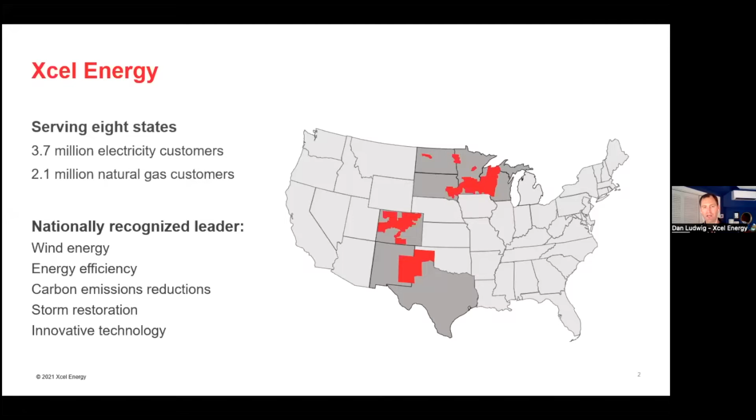This all points to, as we're looking forward, what can we do to help reduce emissions and drive towards a more carbon-free system. So we've made 3 announcements recently. We were the first utility in the nation to commit to carbon-free electricity generation by 2050. There have been a lot of other utilities that have done that since, but we were the first.

We also have an intermediate goal of 80% reduction in carbon emissions from 2005 levels by 2030. Since then, we've made 2 other announcements: to be a net zero natural gas service by 2050, and to have zero carbon fuel for our customers' vehicles within our service territory by 2050.

So these are 3 very ambitious goals. I'd say for the 2030 goals, we've got a pretty clear path, but that last stretch from 2030 to 2050 is going to take some new types of technologies that we probably aren't fully aware of yet, or that aren't fully commercialized yet, that we'll have to develop to get there. I'm going to be speaking mostly about the electricity goal here, but the other goals have a similar discussion.

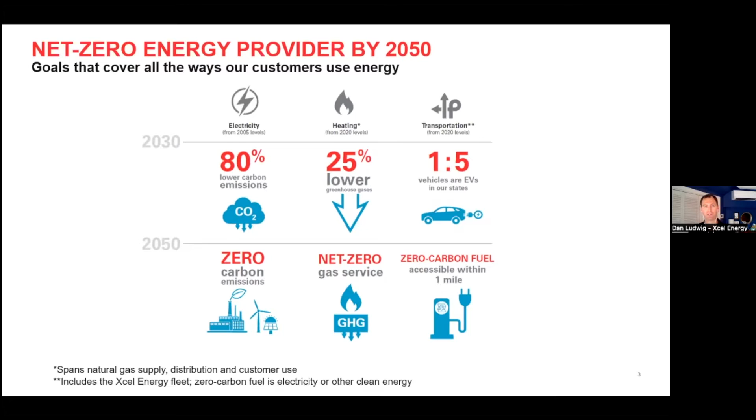So just talking about that electricity goal for a little bit. Our plan right now to get to carbon-free by 2050 involves closing down our coal plants - we're closing a lot of megawatts of coal by 2030. We're also going to be adding a ton of renewables to the system, 5,800 megawatts by 2034, and extending our nuclear plants.

So, like I said, I work on our nuclear side of the house. Part of what we're looking at is how we can keep additional uses for the nuclear plants, to keep them extended and open for longer. And then this last piece: enable a carbon-free future with firm dispatchable generation.

We all love renewable power, but one of the challenges is it's not always available. So in addition to the renewables and nuclear power, we're going to need some additional carbon-free dispatchable generation - something we can turn on when we need it, when it's not windy and not sunny.

Right now, we largely use natural gas plants for that. So if we want to be carbon-free and not use natural gas, we have to find an additional source. And that's where this hydrogen stuff starts to fit in.

We want to do all this in an affordable way and keep the system reliable. We don't want to have rolling blackouts. We want to make sure people can afford their electricity and keep their power on. So that's kind of our big picture plan.

Looking at that 2030 plan, where we're going to reduce our carbon emissions by 80% from 2005 levels - you can see right now we're about 60% carbon-free in 2020, between nuclear, wind, solar, and some other generation, largely hydro.

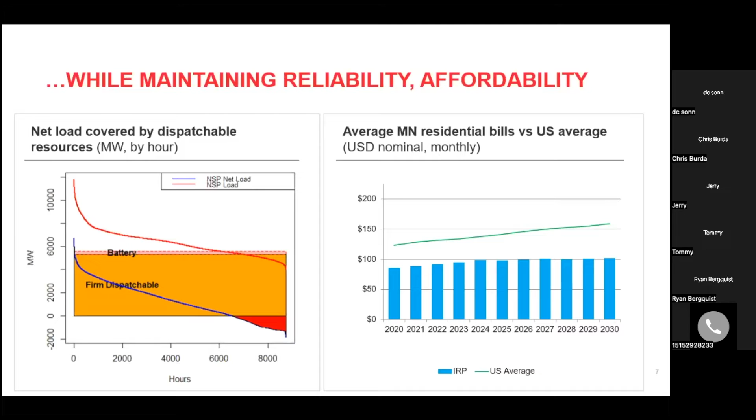Right, yeah, and this is our plan that we've submitted to our regulator, the Public Utilities Commission, and we've proposed adding this - it's quite a large battery, but it's small compared to the rest of the graph here. If we wanted to add enough batteries to cover this whole thing, that'd be a very, very expensive, prohibitively expensive project to put in.

But I don't know if you can hear me. I don't know how to raise my hand either.

This is Chris Burda. My question was about the batteries also. We've been told over and over that we'll never achieve this without batteries, and so energy storage in whatever capacity, whether it's batteries or another technique - but yeah, I agree, I'm wondering why this doesn't expand and contract at different times, the battery. Right.

Well, and in particular, these days, whenever you see a new solar field announced, it almost always is accompanied by some sort of a battery installation.

Sure, and I'm frankly not a battery expert, so I can't speak to it in detail. I know batteries are really great for short duration storage, so for less than 3 or 4 hours, that's where they're the most cost-effective energy storage mechanism. When you start talking about extended power availability for more than a couple hours, batteries get very expensive and very difficult to use in that capacity. That's why we're talking about technologies that probably don't exist yet, and we're looking across the board at various energy storage means so we can have firm, dispatchable, all available power when we need it.

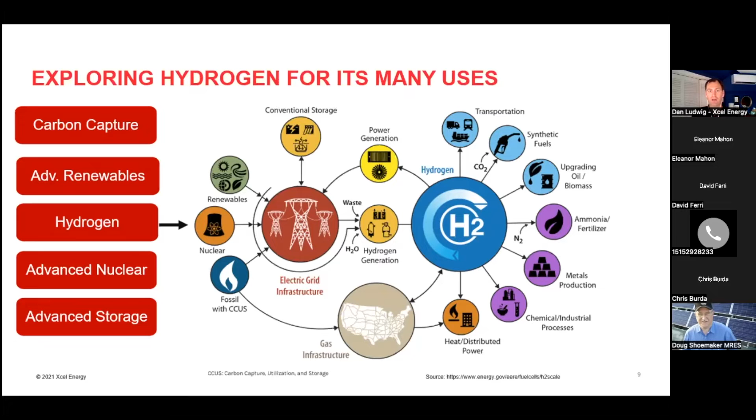So why aren't we doing this already? Well, hydrogen is not cost effective. Just trying to make a little bit of a comparison here. Could hydrogen follow the same cost curve as wind? Wind, back 20, 30, 40 years ago, was not cost competitive. But as demand went up and we built more windmills, there was more manufacturing, more supply, more demand, costs came down.

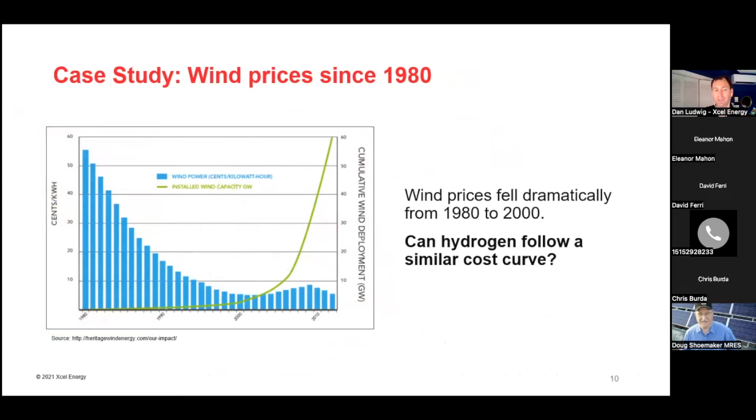And that's really when you saw, starting in 2000 I'd say, is really when you started to see a lot more windmills going up as the cost came down. And so we're looking at hydrogen similarly. How far back are we on that cost curve? I'm getting some feedback again, if someone could go on mute, thank you.

That's assuming some gas prices like at $3 to $4 per MMBTU, which if you're following natural gas prices, they're a bit higher right now because of, as you can see at the pump, it's a similar story with inflation as well as the Russia-Ukraine war going on. There's a lot going on that affects gas prices, so that's a bit higher right now.

But just kind of pegging this at that long-term average, it's about $1.50 for hydrogen per kilogram right now. So we're in this for the long haul. We're doing research now, we're looking at things now. We're looking forward to say by 2030, this 2030 to 2050, when we're trying to get that last 10 to 15 to 20% of our carbon-free generation, is that when hydrogen will really start becoming cost competitive.

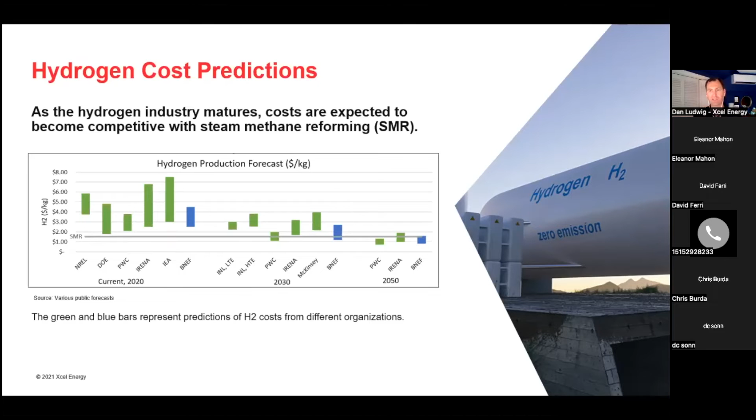So, I'm going to talk specifically about Xcel Energy nuclear. Xcel Energy non-nuclear is also doing a bunch of work on hydrogen, I can kind of speak to that broadly too if anyone has questions on that, but I'm going to talk specifically about what we're doing in nuclear.

So we formed a consortium with 2 other utilities, Energy Harbor, based out of Ohio, and Arizona Public Service, based out of Arizona, as well as Idaho National Lab up in Idaho Falls. We all have nuclear power plants, and we're all exploring how we could integrate nuclear power with hydrogen.

There's a couple of terms here I'll take a few minutes to explain because it's important to show some differences here. Energy Harbor is leading, we're doing this in a multi-phase approach. Energy Harbor took phase 1, and they're installing a low temperature electrolysis skid, like 1 to 2 megawatts, so it's a pretty small scale, low temperature electrolysis system, and they're doing it at their Davis-Besse plant in Ohio.

We also, as part of phase 1, Xcel Energy and APS did what's called a technical and economic assessment. This work was completed by Idaho National Lab, Argonne National Lab, and NREL, National Renewable Energy Lab. We worked together with them to evaluate what were some potential options where we could model making hydrogen from the nuclear plant. We got a lot of really good insights from that.

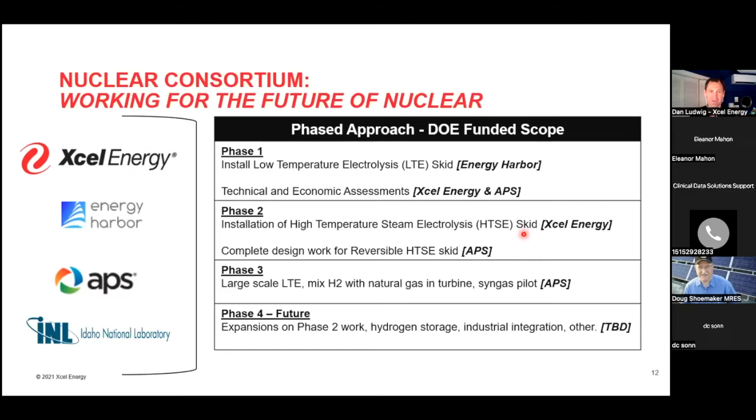For those of you with experience with power generation, this may all be things you know. The way we make nuclear power at Prairie Island, a pressurized water reactor, involves two loops. One loop, called the primary loop, has water that pumps into the reactor, goes through a big heat exchanger called a steam generator, and then goes back to the reactor. That's a closed loop of heating and cooling water. Then we have a second loop, the secondary, where we take cold water, pump it into that steam generator, it boils, turns to steam, turns a turbine generator and makes electricity. After it turns the turbine generator, it goes back down to the condenser and through the cycle again. That's another closed cycle.

Then we've got a third cycle where we take cold water from the Mississippi River for both of our nuclear plants. We take it from the river, cool off the water in our secondary, and then send it back to the river. We use cooling towers in the summertime to help cool off that water before we return it to the river, but then we return it just a little bit warmer than we took it out. We have a permit that allows us to return the water at a certain temperature to make sure we're not negatively impacting the river. So that's at a super high level how a nuclear power plant works. It's very similar to a gas plant or a coal plant, other than this part about the nuclear reactor.

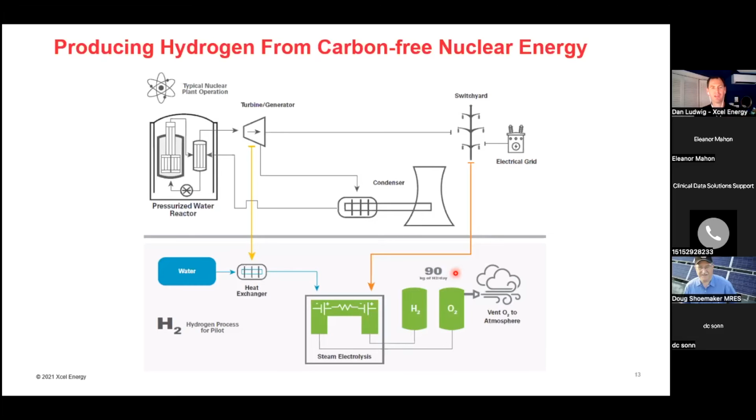So if we wanted to do something great with this hydrogen, it'd be limited, and this next slide really talks about that. How much power are we using, for example? Prairie Island, between the two nuclear power plants, powers about 1 million homes. How much electricity are we using for our pilot? Enough to power about 150 homes. So it's really not a lot of power, very small scale. We're doing that on purpose, one because of the availability of the electrolysis system, but two, also because we want to work through all the regulations when it's smaller in scale. As an example of what you could do with 90 kilograms of hydrogen a day...

If you had a hydrogen fuel cell electric vehicle, and if you drive out to California, they have fueling stations and hydrogen fuel cell vehicles. They typically have a tank of about 5 kilograms when filled, and can drive about 300 miles on a tank. You could fill that tank about 18 times a day with that 90 kilograms, so you could drive about 5,400 miles. As a personal user, driving 5,000 miles is a lot of miles, but when you think about a large industrial facility or even a fuel cell filling station, if only 18 cars could fill up in a day, it's really not that much hydrogen.

So just to make the point, we're doing this small scale hydrogen project so that we can learn the lessons from the regulatory process, things related to the scale, but you can also apply them to a larger scale system.

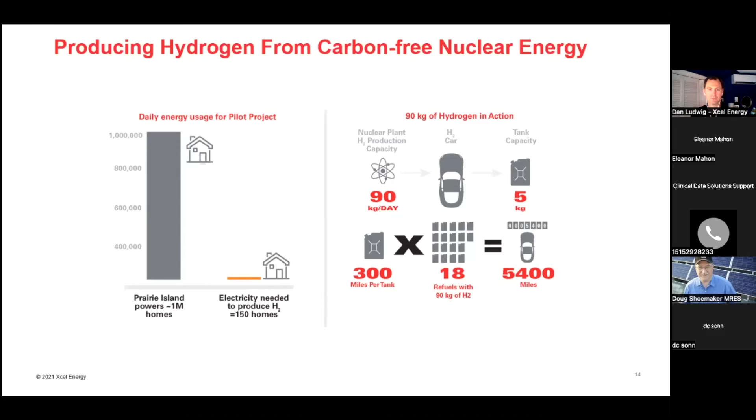The next slide is a schedule of the project. We were notified of the award from the Department of Energy on October 8th of 2020. For those who know your periodic table, the atomic mass of hydrogen is 1.008, and the US Senate has declared a resolution that October 8th, 10:08, is Hydrogen Day. So if you want to have a party for hydrogen, have it on October 8th. Also, if you're looking for announcements from the Department of Energy, they tend to come on October 8th or thereabouts, so keep your eyes out around the first week of October. We're all looking forward to a month from now - there are some big announcements we expect, and we're thinking they'll probably come October 8th.

So we were notified of the award on October 8th. It took us until June 1st of 2022, so over a year and a half, before we actually had the funding available to start the project. Part of that is working with the federal government - there's a lot of red tape, a lot of processes, a lot of things you have to comply with. Xcel typically doesn't do research and development - this is a new area for us. We typically make power for our customers at an affordable price and make sure it's reliable. So doing research, looking forward to 2050, this is a new thing.

So it took us a while to get all of our processes lined up with what's required from the government, and also just make sure we could execute the project on schedule and budget.

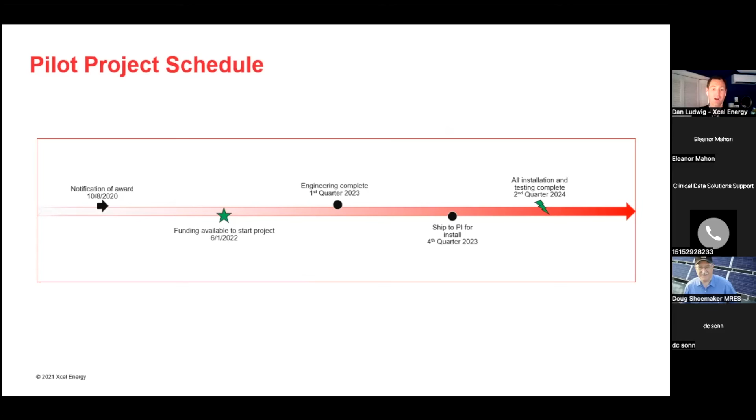All right, well, that's my last slide, Doug. I do have a final slide, required acknowledgements and disclaimers. Just so you know, this was funded by the Department of Energy. I've mentioned that several times. So we got a $14 million grant from the Department of Energy.

It's an 80-20 cost share, so the federal government pays 80%, Xcel Energy pays 20%, and they're really pushing to help this hydrogen industry develop. And then you can read this long thing on your own. It essentially says the government paid for this, but they are not saying that this is right. They're saying it's on us to make sure it's right.

So with that, that's my last slide, I think. I'll open up for questions if anybody has any.

I'll jump with the first one. Dan, one thing I've heard is that in the automotive side, one of the biggest uses appears to be - in fact, I have a friend working in a company in Arizona where they're doing over-the-road tractor trucks, 18-wheelers, and powering them with hydrogen. Are you aware of any of that?

Oh yeah, there's a lot of movement in there. There's several big companies that would like to be the hydrogen producer. They want to put down the fueling stations. They want to essentially dot the highway, the interstate highway system, with hydrogen fueling stations. And so yeah, that could be a very, very real potential use of hydrogen.

Dan, did you say that Xcel expects to be out of coal by 2030? Yeah, that was way back at the beginning. Let me show you what that one looks like. And this was referencing, I believe, our Minnesota resource plan. Oh, okay, so that's Minnesota only, not necessarily company-wide. I'd have to validate that question and get back to you.

Well, it actually doesn't really matter. My point is that yesterday the Department of Energy released a study saying that 80% of U.S. coal power plant sites could be converted to nuclear power plant sites if they use these new generation small nuclear plants. And if the industry follows through on that, it means nuclear isn't going anywhere, and that underscores the direction you're headed. Nuclear may be around for longer than people expected, and if there can be a side benefit for hydrogen as well, then all the better.

Yeah, I'm familiar with that report the Department of Energy published. When you look at a coal plant, if you take it down but keep the switch yard there, running transmission lines is really hard. But if you already have the switch yard and transmission lines, and probably a cooling water source, there's a lot of infrastructure there that you could use to put down a new nuclear plant.

I think a lot of people are recognizing now that in a carbon-free world, 100% renewables unfortunately isn't going to get us there. We need firm and dispatchable generation, something you can turn on and off when you want it, and know that it's going to be there. So that's why we're looking at, and Xcel is looking at, advanced nuclear. I had a slide that talked about all the different things we're looking at, and we're not ruling anything out for how we get to carbon free by 2050. So yeah, great comment.

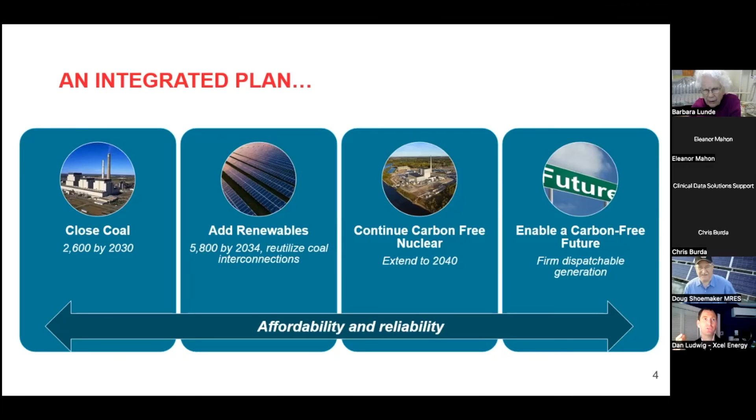I see another question here from Barbara: is the hydrogen generation process amenable to using nuclear energy only when it's available? That's a great question. So the hydrogen system can be ramped up and down. One of the things I should have mentioned earlier, one of the things we're talking about with nuclear power is - I'm going to go back to this slide.

I think that's the last question I see. Oh - years ago, Dan, Xcel or NSP used to always say they could not ramp up and down nuclear plants, and that has changed now, right?

That's correct. We call it flexible operations or flexible generation. Right now we operate in what's called a day-ahead market, and the grid operator looks at how much power we're going to need for the next day and says, Xcel, we're not going to need your nuclear plant tonight, can you back off by 20%? So we'll actually back off our nuclear plants by 20%. You're right, we used to be full on 100% all the time. Now we are backing off by up to, I think, 20 or 25% at our nuclear plants when needed, when we have too much power on the grid.